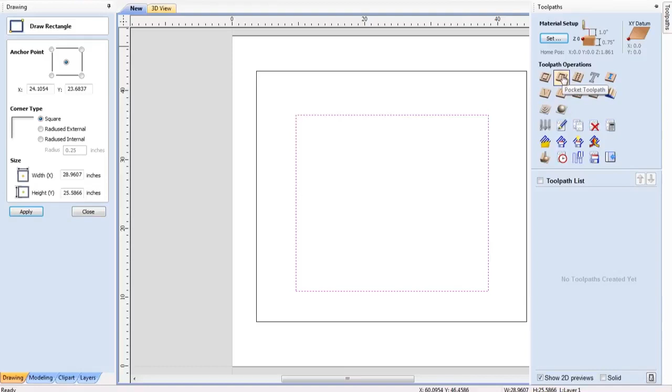I'm going to make the inside cut and make the depth of the cut smaller than the thickness of the wood — it can be whatever you need. Use a quarter down cut tool and leave the rest of the factors the same, although change the name to Inside Pocket.

After changing the name, hit Calculate to check.

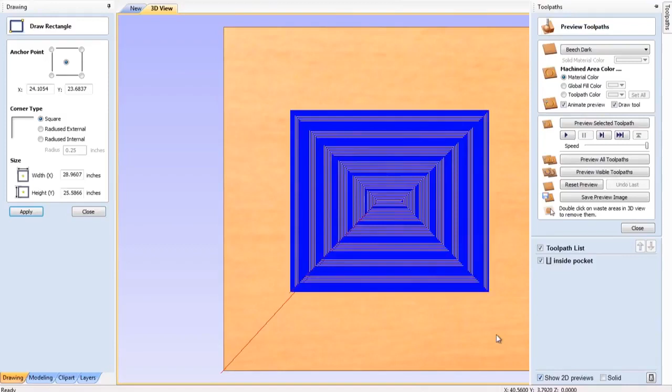Then we're going to click the outside. Then we're going to click Profile Cut.

When doing a profile cut, make sure the cut depth is the same as the original dimensions you made for the wood. Then we're going to use a quarter down cut, which refers to the bit. Make the machine vector outside right, so it shows the machine where, based on the line, to cut.

Then we're going to add tabs. When adding tabs, you can click directly on them to delete. You can click onto the line to add more.

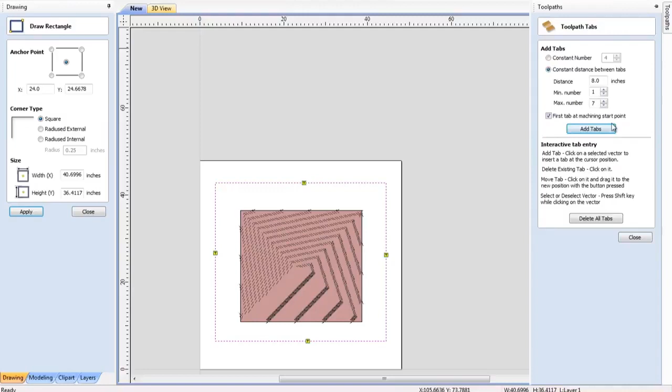Then change the name to Outside Profile and hit Preview, and make all pocket cuts before profile cuts to prevent shifting.

After everything is finished, there are two ways to save something from VCarve. A CRV is used to save the VCarve document so it's able to be edited later, although this cannot be used at the shop.

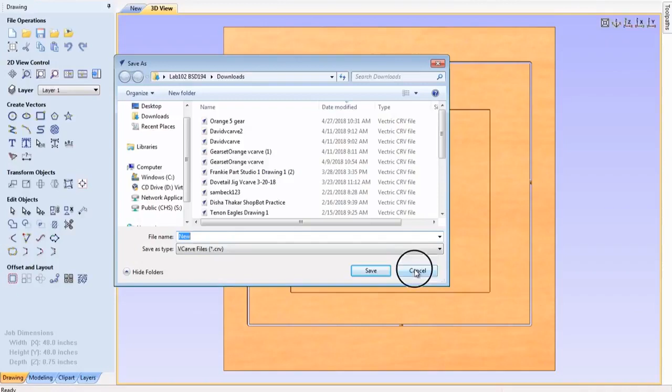SBP is used to save the toolpaths, and only the toolpaths, so it can be used to tell the shop what to cut. By saving this way, this file cannot be edited in VCarve later.

Make sure when you're doing this that the toolpath list is checked.